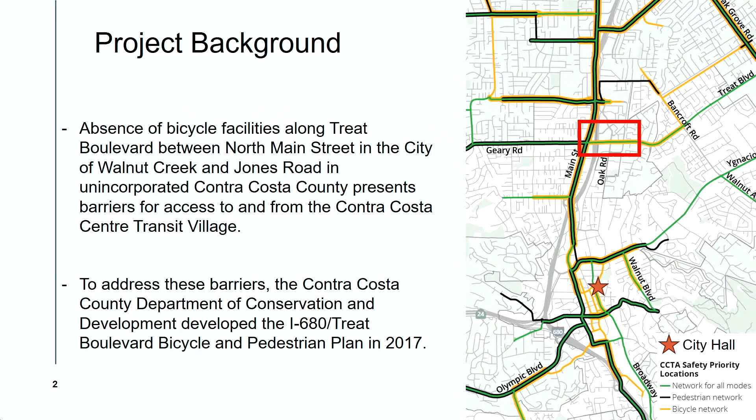The Treat Boulevard Corridor Improvement Project implements the feasibility study by constructing context-appropriate Class 4 separated bikeways along Treat Boulevard between Jones Road and North Main Street in both directions, as well as improving pedestrian refuge islands, crosswalks, traffic signal timing, and signage. The project is on Contra Costa County's list of approved projects and is in the city's 10-year capital improvement program.

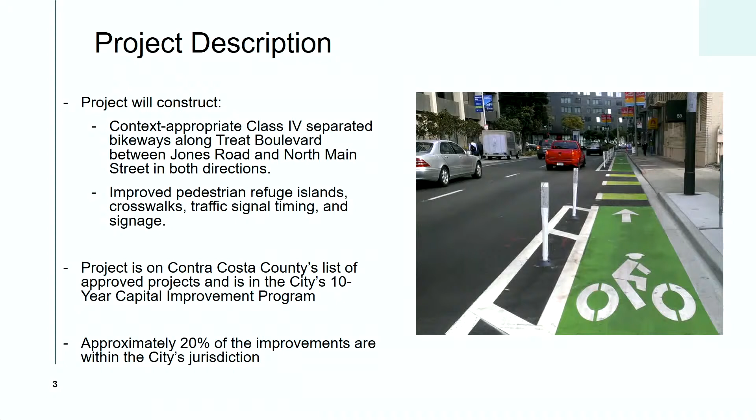Approximately 20% of the improvements are within the city's jurisdiction, and we will start looking at these proposed improvements in the next slide. So this is really the section of the project that is within the city's jurisdiction, and that is between North Main Street.

I wonder if this is a laser pointer. Oh, perfect. Or doesn't work. Yeah, I guess I'll just... Do you know if we can point anything on the? Oh yeah, the mouse, perfect. Thank you so much. Thank you. Yeah, so I'll use this laser pointer. Perfect, that's cool. Jinx.

This is the second segment of the project, between Buskirk Avenue and Oak Road. Also, we'll start with the westbound direction.

Here there are some distinctions from the previous slide, where you'll notice there is a bike lane that goes around the BART column, if you're familiar with this area. This will provide a more protected Class 4 bike lane around the BART column and before rejoining the Class 4 bike lane in the westbound direction, channelizing bicyclists onto the pedestrian refuge island at this corner.

Here we are modifying this free right turn. We are removing it and closing it with this nicely designed pedestrian refuge island, which will also incorporate a new crosswalk, a bike crossing, and a modified curb ramp. Then bicyclists will be able to continue onto the westbound bike lane that I showed earlier.

Another distinction here along the westbound lane is that we will be closing this slip lane shown here at the right corner, upper corner. This slip lane will be converted to a dedicated bike lane that will later on be converted to a shared use path for pedestrians and bicyclists to use.

This shared use path will continue and connect to what is now the sidewalk that is 10 foot wide. So all of this will turn into a shared use path.

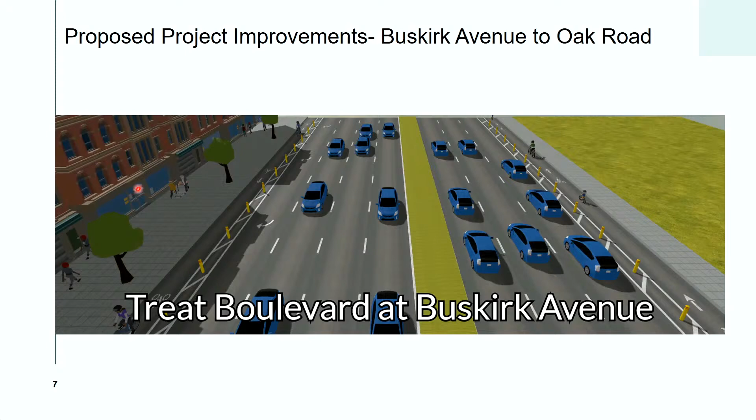This is also a road section in 3D, just before the intersection with Buskirk Avenue. Here we see the separated bikeway, the Class 4 with vertical delineators, and the travel lanes, same on the eastbound side. What this 3D does not capture is the off-street shared use path, because we're quite limited with StreetMix, the software that creates this.

Finally, this is the Oak Road to Jones Road segment, also in unincorporated Contra Costa County. This segment is different, with a couple of constraints. One is the parallel parking along the westbound lane. In the feasibility study, after it was vetted for a couple of years by the county, city, and Caltrans, there was a demand to keep this parallel parking, so we were quite restricted with what we could do curb to curb.

As a result, it's going to be a Class 2 bike lane just in this segment, as shown here. This cross-section shows the parking lane, the right turn lane, the bike lane, the travel lanes, and the turn lanes in the westbound direction.

As for the eastbound direction, we are incorporating Class 4, separated from travel lanes with vertical delineators, and also finally closing the free right turn onto Jones Road, shown here in a picture of the existing condition. We are closing this free right turn lane for a more safe crossing movement for both bicyclists and pedestrians, and finally there's a bike box for those who want to turn left onto northbound Jones Road.

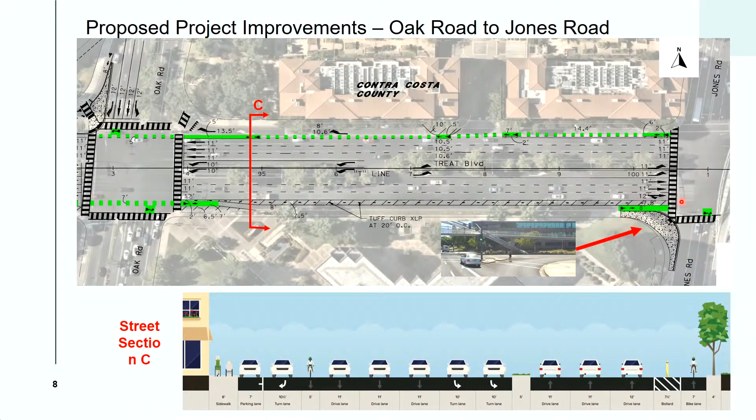Now I want to talk about collision profiles. Contra Costa County developed Vision Zero, a plan that aims to eliminate fatal collisions and collisions with high severity, referred to as KSI.

There are a few collision profiles in Vision Zero. The three that this project addresses are: profile number 5, collisions at signalized intersections of major 5+ lane roads. The countermeasures in Vision Zero that apply are reconfiguring or removing slip lanes, converting permissive turns to protected turns (at the North Main Street intersection I just described), and signal timing improvements, since we are improving signal timing at all intersections to accommodate vehicular, pedestrian, and bicyclist movements.

The second profile this project addresses is profile number 7, bicycle-involved broadside collisions at urban intersections. This project implements prohibiting right turns on red, bike boxes, two-stage turn queue bike boxes, green bike lanes, conflict zone markings, and protected facilities on intersection approaches.

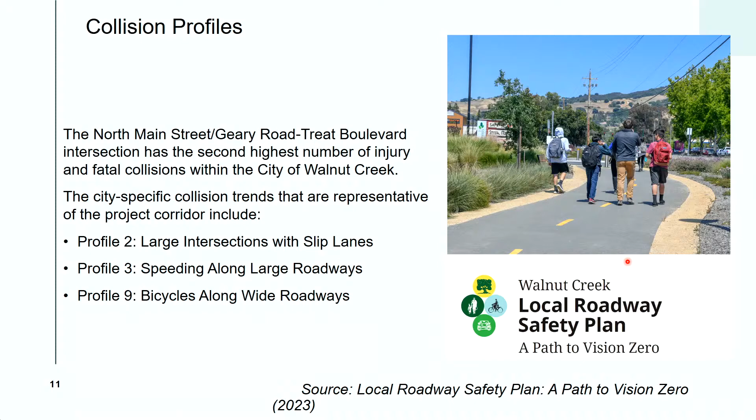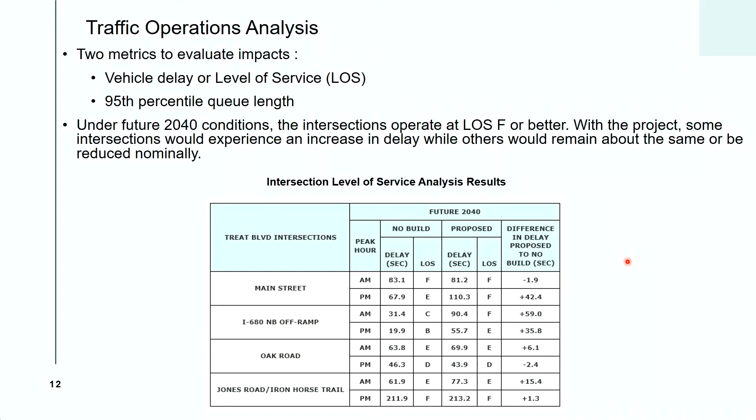DKS has been involved in this project right from the beginning, so I'm happy that we had the chance to continue with it. I must say that the plan we have right now is a significant improvement over the preferred alternative that was looked at, and it has a lot of safety features incorporated. So what we did was analyze the preferred alternative we were looking at before and the refined plan that Mo has shown you.

We'll be looking at some numbers here. We used the Synchro software to do the level of service analysis, which looks at the performance of the intersections themselves, and then also used the SimTraffic tool to analyze queuing at movements of interest, which I'm going to point out to you.

If you look at this table, we have the level of service analysis results for the no-build. We used 2040 horizon volumes to do the analysis. So as you can see, we have the no-build scenario - that is, if you don't do the project, what would the level of service look like? And then if you do the project, what would it look like? As you can see, there'll be some marginal deterioration of level of service. And of course, you're improving the facility, making it safe for bicyclists and pedestrians. So there will be some trade-offs, but these are not significant trade-offs that we need to make with the safety and providing the ped and bike facility that this project will offer.

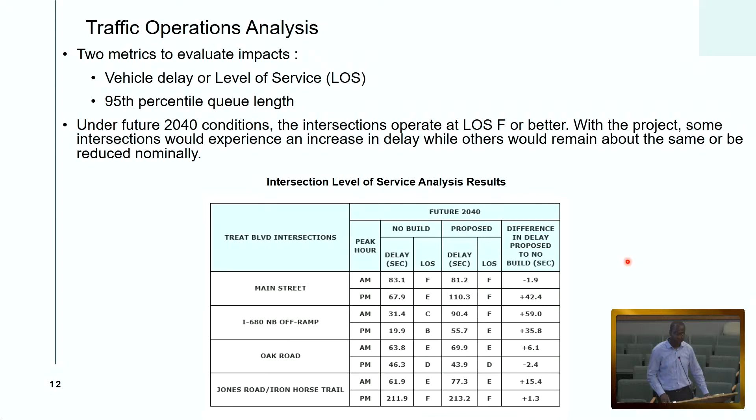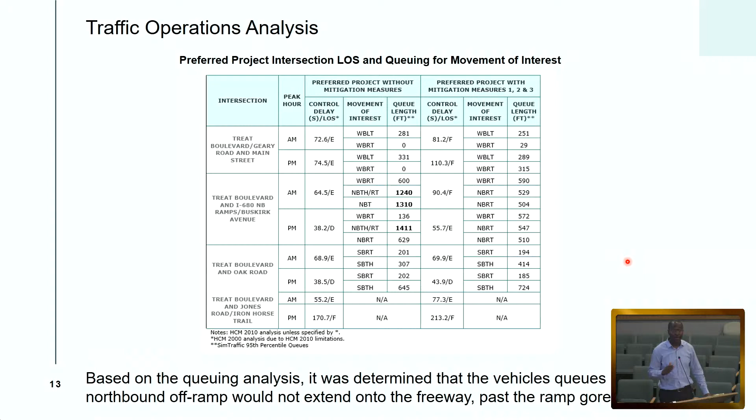So next, this is a direct comparison of what we call the preferred alternative and what we are looking at now. What we're looking at now has mitigation measures. Without the mitigation measures, looking at the Treat Boulevard and I-680 off-ramp intersection, we're going to have queuing on the northbound approach for like 1,240 feet. But the length of the ramp itself is about 1,000 feet, so that would bring traffic to the freeway, which Caltrans doesn't want to see. So we had to come up with measures to address this specific issue.

What we did was recommend eliminating the east crosswalk, because with the reconfiguration of the lanes, you now have a double right-turn lane, which would help with the operation of the ramps, particularly during the AM peak. So eliminating that crosswalk, yes there's a trade-off, but we looked at the volume of pedestrians using that particular crosswalk and it's very minimal. You also have the Oak Road crossing, which is about 640 feet away, so that would provide an alternative for people who would otherwise have used the crosswalk at the ramp. Eliminating that crosswalk provided some opportunities - it helped reduce the queuing from 1,240 to 529 feet, which will be contained in the ramp. So that addressed that Caltrans concern.

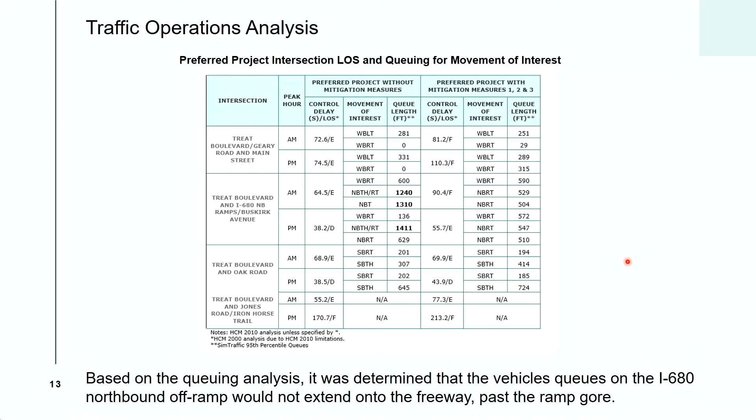All right, thanks, David.

The final two slides are on the project status and the project funding. The total project cost at the moment is currently estimated at $6,220,000.

The county is funding this project with grant funding, namely the State Transportation Improvement Program (STIP) funds, the Highway Safety Improvement Program (HSIP), Central County Area of Benefit funds, and local road funds. The city's portion of the project is $1.3 million and is expected to be funded by Transportation Fund for Clean Air Grant (TFCA), Traffic Impact Fees (TIF), and Measure J.

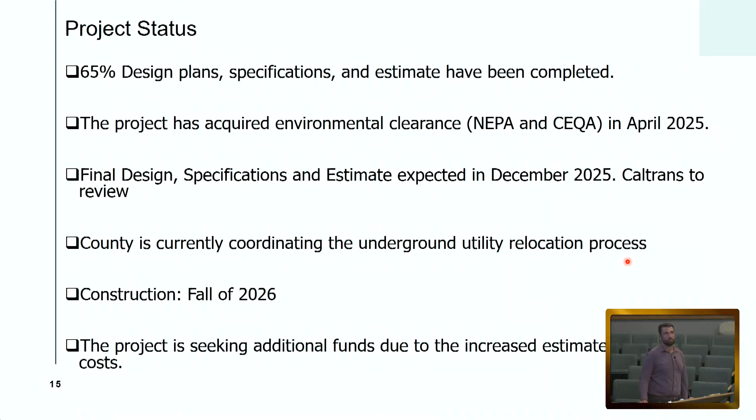On the project status, 65% design plans, specifications, and estimate have been completed, and the project right now is at the 95% stage, which is considered the final design stage. The project has acquired environmental clearance, NEPA and CEQA, in April 2025.

Final design specifications and estimate are expected in December 2025. Caltrans has been coordinating this project with us and reviewed the 65% design plans, and we have also been coordinating this project with the city's design team.

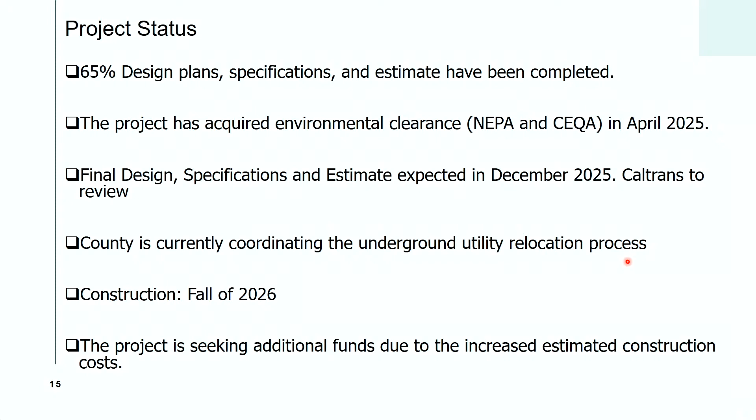The county is currently coordinating the underground utility relocation process, which is a very lengthy process. Construction is currently expected to be in the fall of 2026, barring any utility relocation delays. The project is seeking additional funds due to the increased estimated construction costs. Thank you for listening, we're here for questions and comments.

Okay, thank you very much for the presentation. I'd like to open it up to the commissioners for any questions. This is a complicated project, so I'm sure there are some. Absolutely. We'll start at the end. Student commissioner, if you have any questions.

Thank you for the presentation. I was just wondering if you could explain the difference between the different classes of bike lanes. Is that just referring to the size, or?

Absolutely. So the classes of bike lanes in this project are: Class 1, which is a completely off-street path that is not related to, or is on a different level to, the travel lanes. You see them here — this one, for example, is considered an off-street path, so completely separated from traffic.

Class 4 are considered separated bikeways, and they can be separated from the travel lane at the level of the road. For this project, the separation is using the buffer lane and also vertical delineators.

Class 2 is the one we see between Oak Road and Jones Road — this one is a Class 2 just because of those geometric constraints I was talking about. Class 3 are the ones that we would definitely not use on Treat Boulevard, and that is the shared roadway, like those bike markings on the road asking cars and bicyclists to share the road. So that would be a Class 3.

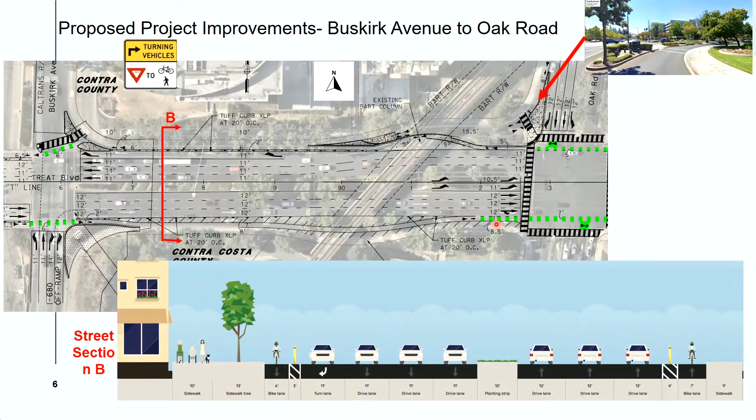Because, to your point, while Treat and Jones intersect elsewhere, a lot of traffic uses this Oak to Jones route to get to where the housing on Jones is. So on this particular intersection on Oak to Treat, from the northbound turning left onto Treat, that's also where you have people turning right from Oak onto Treat, to go up to Buskirk - is that how you say that name? Yeah, Buskirk, yeah - which leads to an on-ramp to 680. So there's consistently issues with traffic with people trying to get over as far as they need to.

And those people turning left from Oak onto Treat frequently are still turning while pedestrians are crossing the crosswalk. And since that is coming from BART to where housing is, did you do a specific analysis on the impact of that particular danger? So which crosswalk are you looking at? The Treat Boulevard at the Oak intersection - okay, so you're saying north-south, those making a right and then the pedestrians also crossing, right?

Yes, so people from Oak turning left onto Treat, where pedestrians are walking across Treat - let me see - along Oak. Okay, so you're talking about the northbound left-hand turn? Yes, northbound left-hand from Oak, yes, to go west, right? Yeah, and then the pedestrians using that crosswalk.

So the thing is, that left hand is a protected left, right? Correct, so they can technically go with the pedestrian crossing. So the pedestrian crossing goes with the through movement, so those going left - once the left hand signal comes on, nobody can cross.

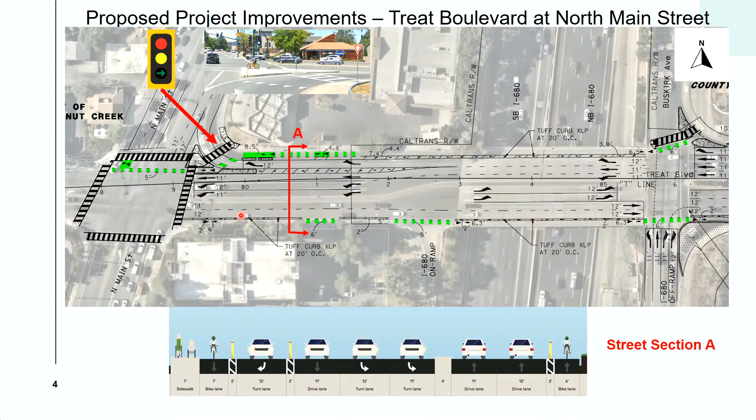Yes, I believe so. And then are we also taking that lane, once you cross the 680 off-ramp at the Buskirk intersection, are we also getting rid of a lane for the bike lane, the traffic lane? So going back to the question about lane removal, eastbound we're not removing any lanes. We can actually fit two through lanes, the buffer, and the bike lane by doing lane narrowing, so there's no lanes removed there.

In the westbound direction, though, we are losing one of the through lanes, but near that Sprout Shopping Center, the lane drops anyway, so from a capacity standpoint, we're just dropping that lane a little bit earlier in the westbound direction. Okay, so we're not losing anything eastbound. Correct, in this view right here at the intersection. Okay, but a little further down, we're losing one, right after the off-ramp. Okay, so off the off-ramp and all the way down, once you cross Oak Road, there is sort of a right turn only lane that goes all the way up to Jones, right? Is that going away?

The one that goes around the BART column? No, I'm talking eastbound. Yeah, eastbound. So the one in the eastbound direction, this lane right here that goes around the BART column, yes, this lane is being replaced by the bike lane.

How about when you're on Oak Road northbound and you turn right onto Treat, currently there's the traffic lanes and then there's a right turn only lane that goes all the way up to Jones. Is that going away? Right, yes, here this free right turn is also being closed as part of this project, so the answer is yes to the elimination of that lane. The entire lane is going away? Yep. Okay, thank you.

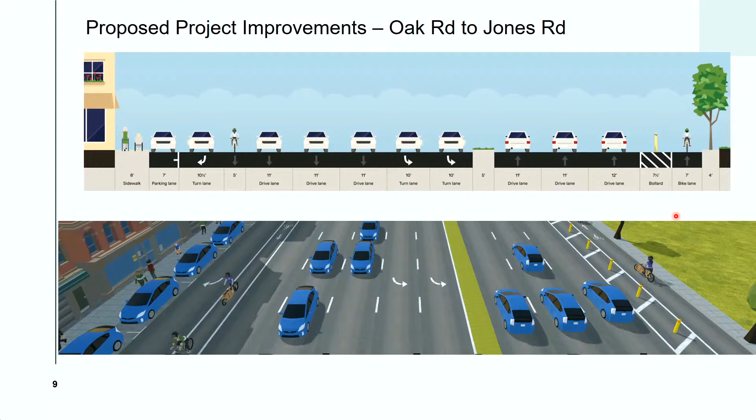Yeah, I mean, this works. So in this section on Treat, you have the sidewalk, the parking, the right turn, bike lane, which the Commissioner has already identified as going to be a little dangerous. I'm wondering if we can flip this around a little bit, and I understand you're 65% into this project, so this might be too late in the game, but I have seen cities where they have a sidewalk, then they have a protected bike lane, and then they allow for parallel parking of cars.

And that creates safety for those on bicycles. Since there is behavior here of people who are not gonna go over multiple blocks to get to Canal to go up, you're gonna have people using bikes, especially as more and more multi-family housing goes in this area. And so I think that's a way we can address keeping the bikes safe, but also keeping that parallel parking.

And then I have to address the behavior of humans, that they don't want to go out of their way, right? So we have just finished building lots of multifamily on Jones Road. There's another plot that has been allowed to build once something comes that way. There's additional housing going in near BART, right? That is a very housing-dense area now because it is BART. And so you're going to have an increase in pedestrians and bikers.

I think it's great that we're prioritizing them. I'm very happy to see that. I do think we need to acknowledge that people don't go out of their way. So that's the behavior that we're trying to accommodate for. And since that was brought up, I just wanted to acknowledge that human behavior shows people won't go out of their way. They want to go the fastest, especially if they're walking or biking, because that takes more energy than driving does.

So tonight's discussion, very brief background and then an overview of the data and the outreach findings. Again, these were brought to you in presentation 1 and presentation 2. And the bulk of this evening's presentation will be about our draft recommendations and where we are in the project timeline. For any new viewers, this curb management plan, we're looking to set data-driven standards to optimize the curb by balancing parking, loading, pedestrian and bicycle infrastructure, placemaking, accessibility, safety, and equity in our downtown Walnut Creek area.

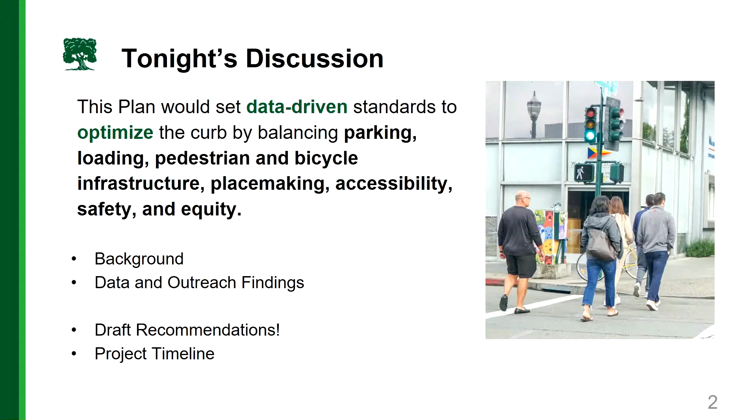So when we talk about curb management, it's about organizing all of these uses, sometimes competing, sometimes they work together, but there's a lot of demand for the curb space, and it's about managing that and balancing amongst all those users.

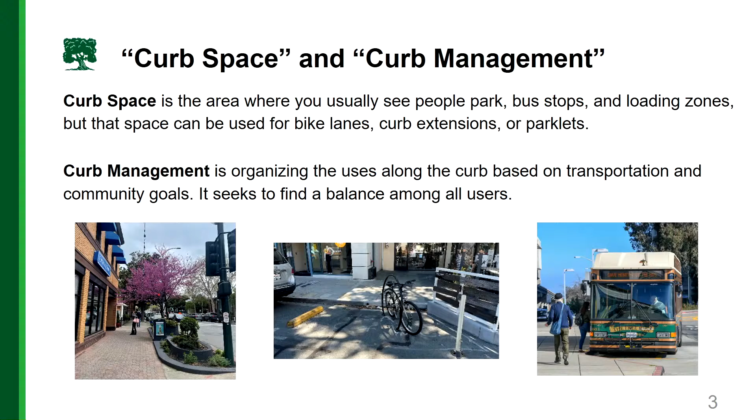So background, this effort that we're in the middle of right now is grant funded by the Metropolitan Transportation Commission, MTC, and it builds on a previous study that the city had done called Rethinking Mobility Plan. From that plan, there are 3 strategies that we're adding to. The first one, improve parking and curb management signage, evaluate zone and demand-based pricing, and then consider municipal garage pricing and demand.

Just to remind everyone, the City of Walnut Creek has an 85% utilization goal for on-street and garage parking. What this does is it balances the asset. The curb, we have a lot of attraction in the downtown area, and so this curb as an asset, we're managing it so that people can get to these destinations. With this 85%, if we're imagining a block face has 10 spaces, 1 or 2 of those spaces are open. This allows for someone that maybe wants to pay a little extra to park next to the curb to easily get a spot. There's no need to be rotating around the block to try to find that one space. So 85% is really this industry sweet spot for utilizing the curb at its most efficient, but also leaving space for those that need it.

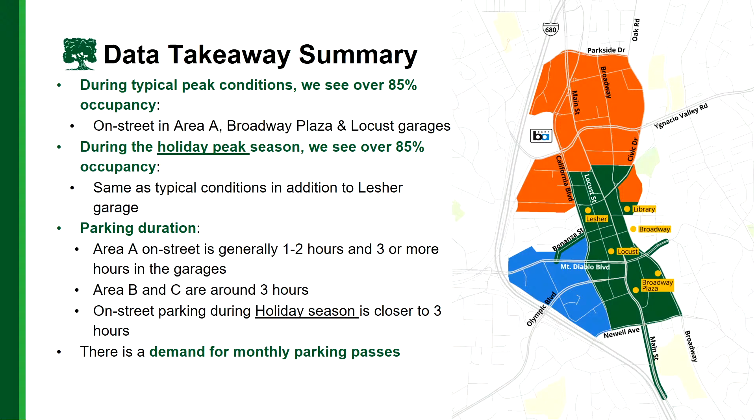During the holiday season, Area A, that parking duration shifted closer to 3. People were staying a little bit longer to do their shopping. And the other note here is while the city does have a monthly parking pass program, it's in very high demand, and there's a wait list of 6 months to a year.

So taking this information to our stakeholders, some internal, some external, we wanted to see if this data matched their friction points, what they were maybe having problems with that we could see in the data.

So we spoke with the Parking Enterprise Fund - staff, internal and external stakeholders where they manage the fund from parking revenue. This includes public works staff, both in traffic engineering, transportation planning, traffic maintenance. We have our garage operators, our enforcement officers, economic development. It's a multidisciplinary team. So we spoke with them.

We spoke with our parking enforcement officers several times, our economic development team. External stakeholders included Walnut Creek Downtown, County Connection, bicycle and pedestrian advocacy groups, our youth commission, transportation commission, and the general public.

The general public, we solicited input from during the Locust Street Fair, and then we also have a Survey Monkey going on now through August 24th.

This is for both visitors, residents - are you a business owner, are you employed downtown? So we are really still pushing to get input from our Walnut Creek Downtown and the public, especially on the recommendations that you're about to see tonight.

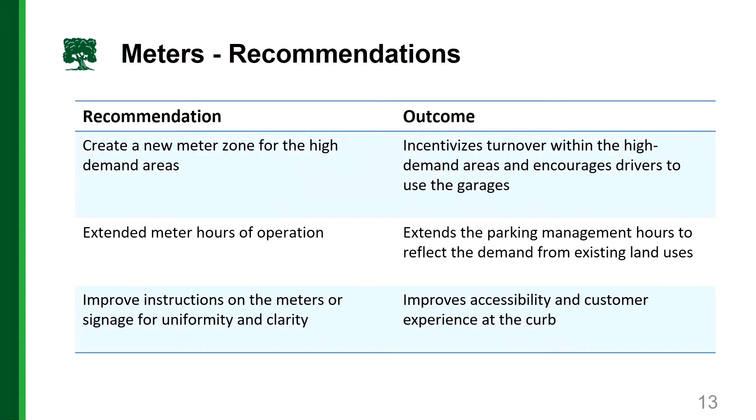Now moving into the recommendations for the meters. The first recommendation is to create a new meter zone for high demand areas, with the intended outcome of incentivizing turnover within those areas and encouraging drivers to use the garages. As part of that, extend the meter hours of operation, since we're managing the parking demand and want those hours to reflect existing land uses—we have a lot of restaurants open past 8 p.m. when our meters stop, so we want the hours to reflect what's currently happening. The last recommendation is to improve instructions on the meters or signage for uniformity and clarity, which improves accessibility and the customer experience. They've already found a spot, so let's make that meter as easy for them as possible.

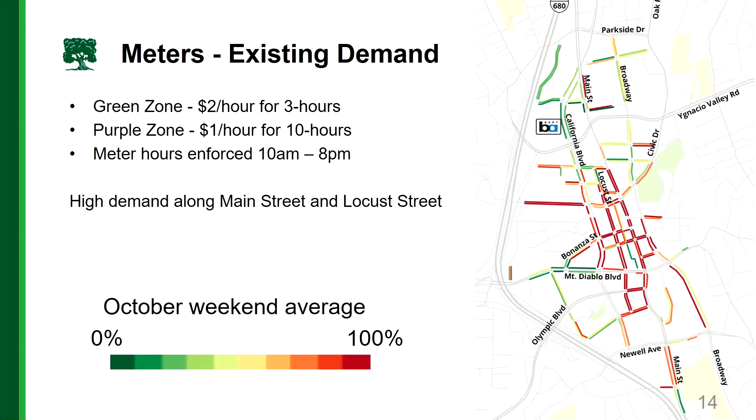Digging a little into the first two recommendations—the third zone and extending the hours—this is existing data we collected in October, an average October weekend. On that sliding scale, green represents a lot of open spaces, and on the far side, dark red is closer to 100%. You can see we have a lot of high demand on average along Locust and Main Street, and that high demand warrants higher parking meter rates.

Traffic safety and sustainability - I mentioned the circling around the block to try to find your space. Again, if you can find that parking space, it really cuts down on excess vehicles on the road.

So we talked about meters, now moving to garages on the recommendation side. Improve wayfinding directly to the garages on the perimeter of downtown. Again, the garage that we saw experience capacity is really in the center - echoing again, that's where people want to be. So trying to get them to, say, the outskirts to our Broadway garage - get drivers to a place with higher parking supply.

The other recommendation here: improve customer experience within the garages by creating an environment that feels safe and comfortable to walk to, from, and in. It will not only encourage visitors to park within the garage, but that safety feeling we want them to feel on the street begins as soon as they park in one of our garages. The last recommendation here: reevaluate the monthly parking program and potentially expand the number of permits.

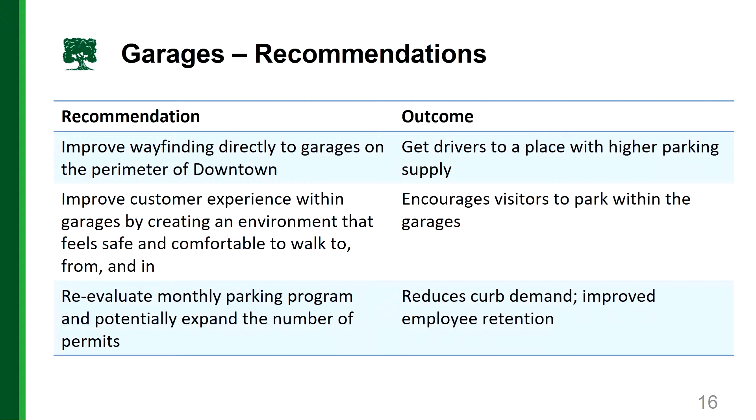Really just take a fresh look at this and see if it's still serving the needs of our downtown community. So the outcome: reduced curb demand and improved employee retention where parking isn't a daily headache.

One thing to point out here, placemaking - that improve customer experience within the garage. We can really treat our garages as a unique Walnut Creek feature where as soon as someone arrives, they're experiencing all that Walnut Creek has to offer, whether that's through art or murals. There's a lot of opportunities within our garages that we can expand the streetscape into these garage facilities.

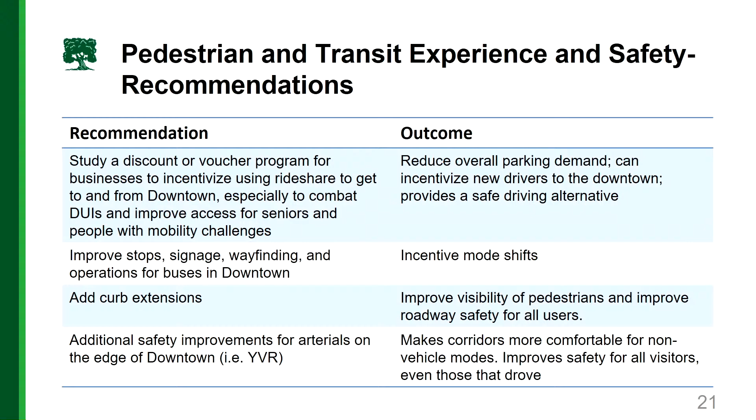And then this last one: additional safety improvements for arterials on the edge of downtown. The outcome makes corridors more comfortable for non-vehicle modes and improves safety for all visitors, even those that drove.

One of them is the leading pedestrian interval. This is the signal timing we currently have downtown that gives pedestrians an extra 3 or 5 seconds to cross before cars start going. This is something we've already done, and there are other things within this plan we can roll out to improve that comfortable feeling, so that even if you drove here, as soon as you start walking around downtown, you can feel that safety.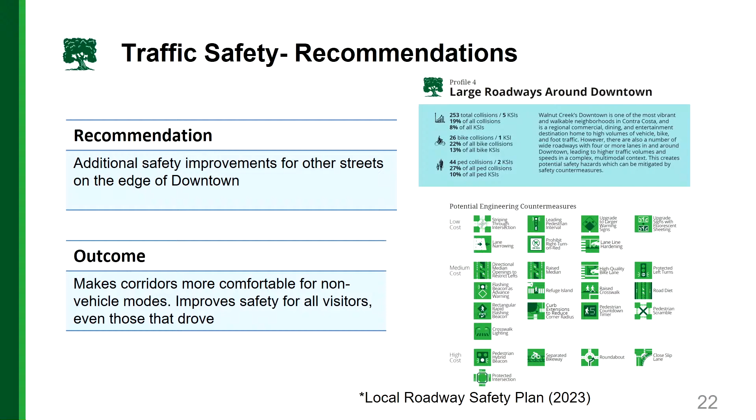And how that feeds into these goals we outlined. This is again where we start to see not everything is bold now. The curb extensions and additional safety improvements, maybe a curb extension here or there, can be done in the near term, but when it gets into physical improvements, there's funding, design, and extra thought that needs to be put into it. One of the goals filled for each of these recommendations is that sustainability aspect, improving the environment for our pedestrian and transit users, getting them out of vehicles and into these other modes.

From the feedback we heard, it's those larger streets around downtown that serve as the barrier. Maybe once people get within downtown, the speeds are lower and they do feel safer. So really we're creating that comfortable option to get to the downtown area.